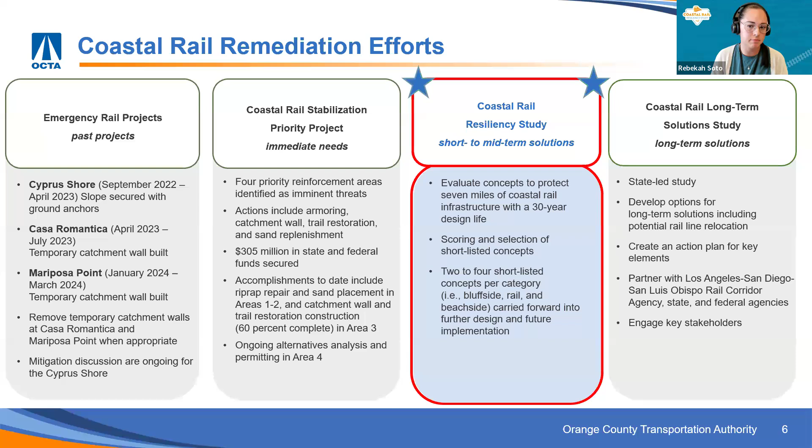Next slide, please. So through this study, we have produced the draft feasibility report, which is here. This is just a very high level overview of what is in that report. And the report is available as well for the public to take a look at. But essentially, it includes these key components.

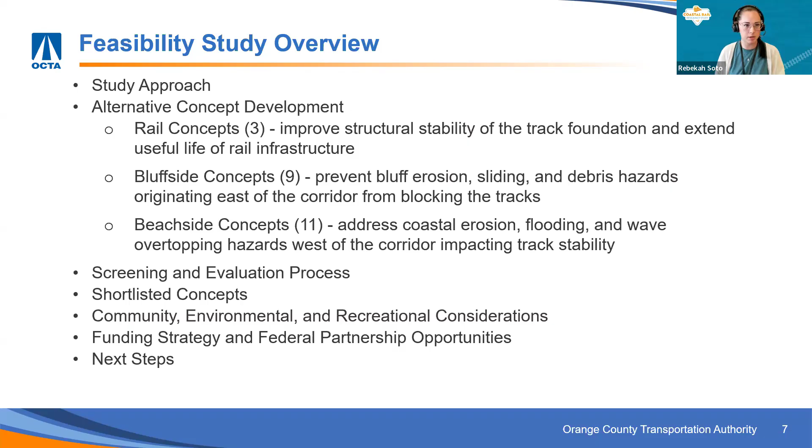We have the study approach, how we got here, what our goals are, our alternative concept development, how we started off with 3 rail concepts, 9 bluffside concepts, as well as 11 beachside concepts, and narrowed it down to that short list I mentioned. Our screening and evaluation process, those shortlisted concepts, as well as the community, environmental, and recreational considerations, as well as next steps, which involves funding strategies, federal partnership opportunities, as well as what the traditional pathway for project development is anticipated to look like. Next slide, please.

And so I want to just acknowledge that we have heard the strong support for sand nourishment and the desire for recurring placement to be integrated into sand retention strategies. We've also heard concerns that shoreline protection structures will permanently eliminate sandy beaches. And we've also heard the desire for more clarity on long-term planning and rail relocation.

In response to that feedback that we've received, we have added a one-time sand nourishment to all shoreline protection structure concepts. So if there's hard armoring involved, it will come with sand. As well as we've provided additional conceptual design to be included in the draft feasibility report, as well as providing more information on the next steps upon completion of this study.

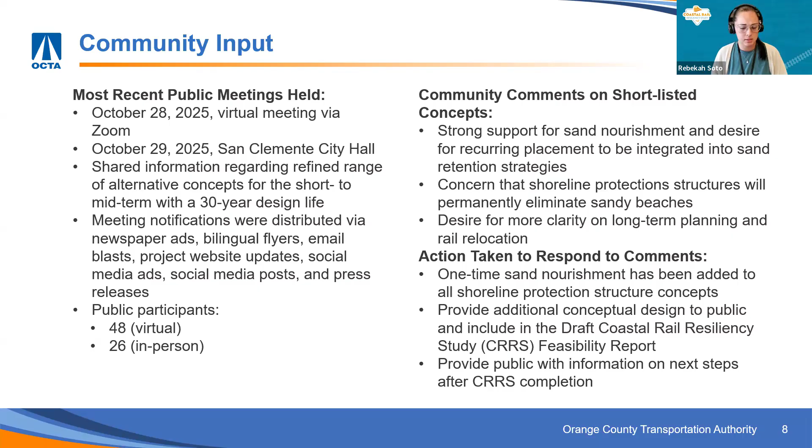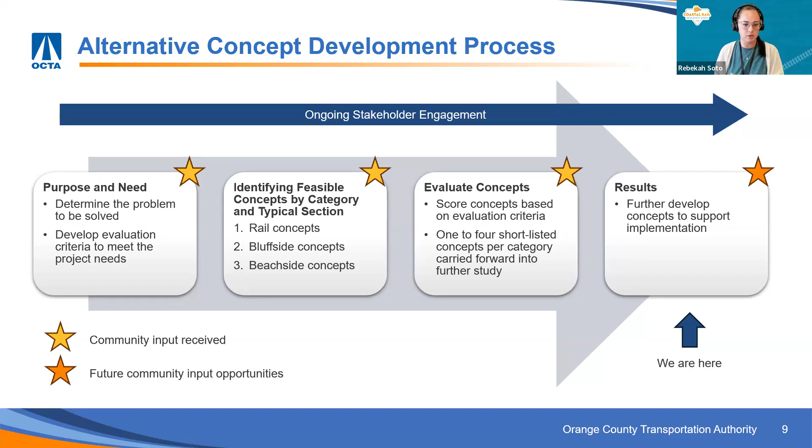Next slide, please. As a quick refresher, the 2 rail concepts that the study ultimately recommends to be carried forward are alternative materials for critical railroad infrastructure to reduce those life cycle costs, as well as ground improvement efforts. The 2 bluffside concepts to be carried forward involve catchment walls, as well as tiebacks / soil nail / pin pile walls. And then for the 4 beachside concepts to be carried forward, and again, these all include a one-time beach nourishment with each shoreline protection structure. So that would be riprap, engineered rock revetment, seawall, or a combination of any of the above.

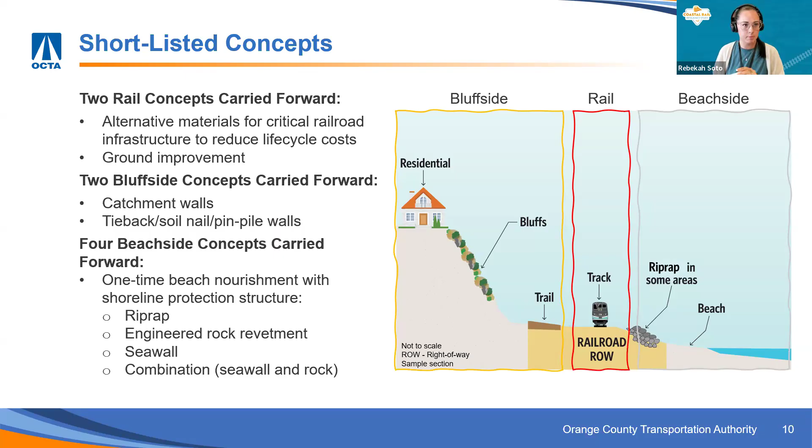With that being said, I'm going to hand it over to Avi Shah, who will go over these concepts in a little more detail. Yeah, thanks, Rebekah. So I just want to dive in a little bit deeper on some of these shortlisted concepts. So we have 3 categories that Rebekah described.

So first, for our rail concepts, the ground improvement helps stabilize the track bed in areas where we've seen severe drainage issues. And we can do that with the installation of soil columns that add competent soil and stabilize that track bed. So it really helps deal with ongoing maintenance issues, issues with our ballast and ties. So this competent soil will help solidify and help stabilize our track bed.

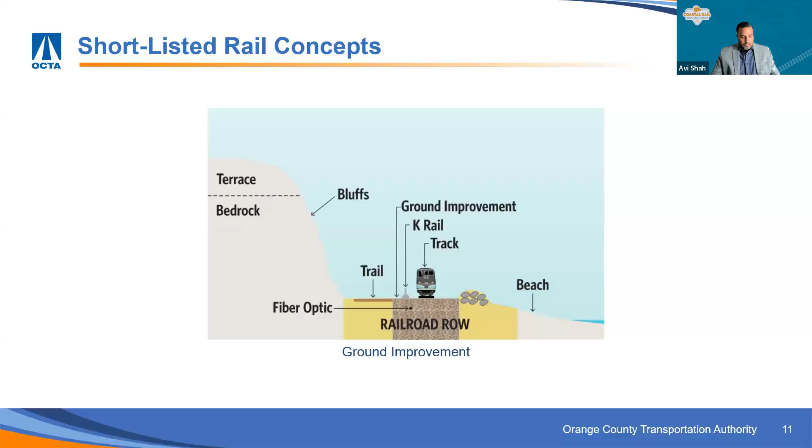Next, I'd like to discuss our bluffside concepts. The first one here is the catchment walls. The catchment walls are intended in areas that are experiencing surficial failures along the bluff. And the catchment wall is constructed at or near the railroad right-of-way, and its intent is to catch any sort of debris that may be falling onto our tracks and impacting our railroad operations. It just serves as a physical barrier from that debris entering the railroad right-of-way. Improves safety and provides ongoing operations for the railroad.

The next concept here are the tieback walls. So these are usually used for deeper seated landslides, and it utilizes a steel tieback anchor that's drilled into the soil or behind a wall, and it's intended to resist the earth pressures in order to basically pin that slope down into the competent earth. Again, this addresses issues where we see landslides happening from underneath the railroad and that are pushing the railroad in one direction, help stabilize that.

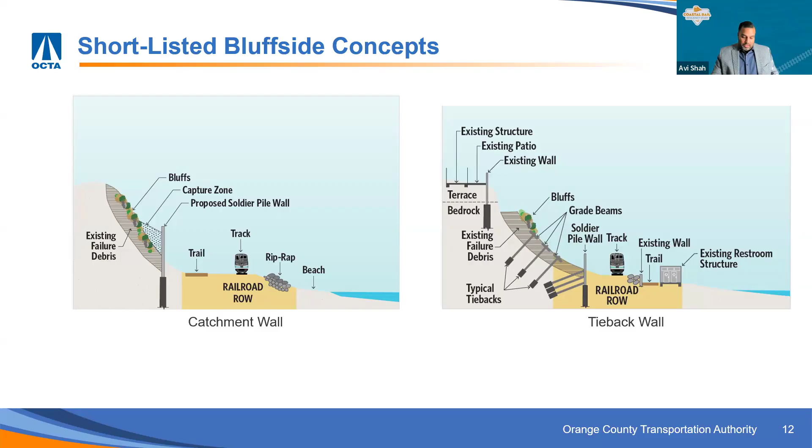Next, we have the soil nail pin pile walls. These are intended for slightly shallower landslide planes that we have seen in some of the bluffs near Dana Point and San Clemente. And this concept consists of either soil nails or pin piles that are driven into the ground, either at an angle or vertically, to resist lateral soil movement and provide slope stabilization. The pins or piles are drilled through that failure plane in order to meet into that competent earth.

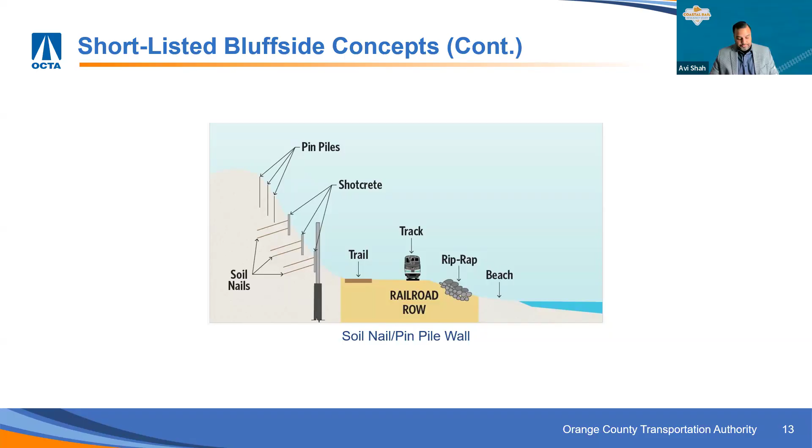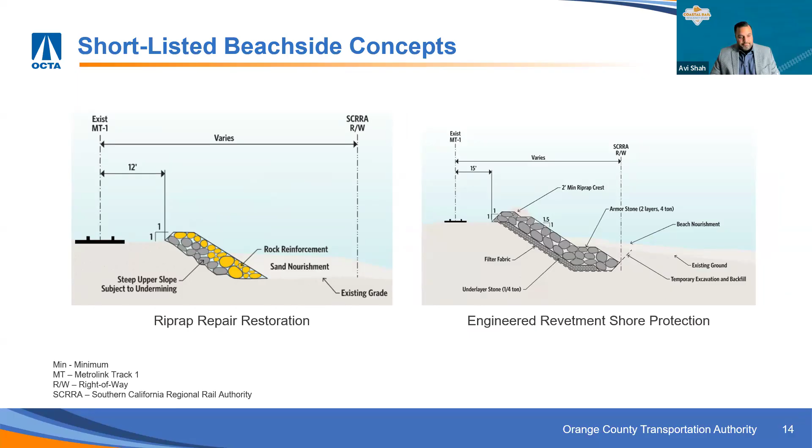Then next we have our seawall shore protection, and this is a vertical element or structure that's intended to protect the track embankment from scour, erosion, and wave overtopping. And it's intended to minimize the horizontal footprint placed within the rail right-of-way. The seawall with the revetment shore protection is similar. It's kind of a combination of the seawall and the engineered revetment where we're providing additional scour protection at the toe of the wall. So those, again, 4 concepts would be paired with that one-time sand nourishment.

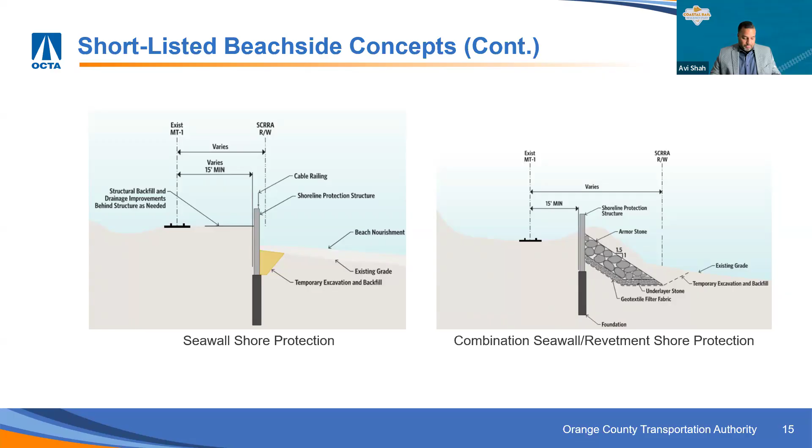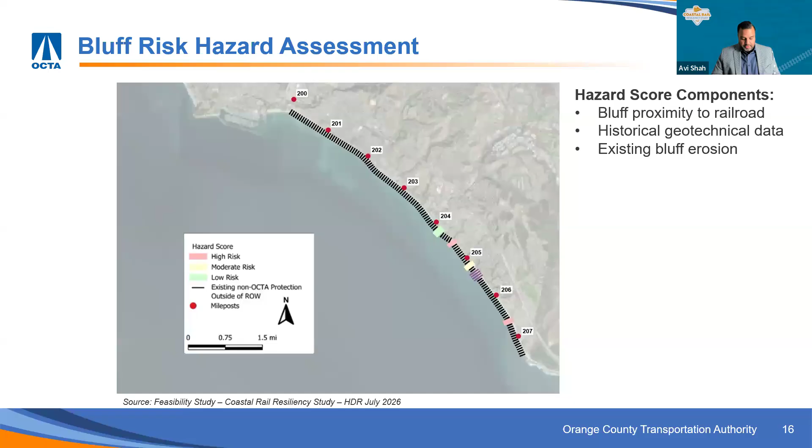And then next, I'll pass it to Russ here to provide an overview of the coastal rail risk assessment. Sure. So in addition to the bluff hazard assessment that Avi just described, the team also performed a high-level coastal hazards assessment for the rail corridor. And basically we took 3 pretty basic hazard score components. One is just how much sand at the time was present in front of the particular location of the rail corridor. The amount of sand represents kind of the natural shore protection that's there.

The next parameter is how is that changing? Is that an area where the shoreline is eroding or stable or maybe accreting? And then finally, the third component is what's the existing level of shore protection? For example, in 2025, there was riprap repair conducted between North Beach and Linda Lane. So that would have a certain reduced risk because it's recently repaired.

There are other areas which presently have little to no shore protection, so that would be more of a higher risk area. The results come together to form this ranking, and the high risk areas, shown in more of a reddish color, are where we would be looking at applying the shortlisted alternative concepts for the beachside alternatives.

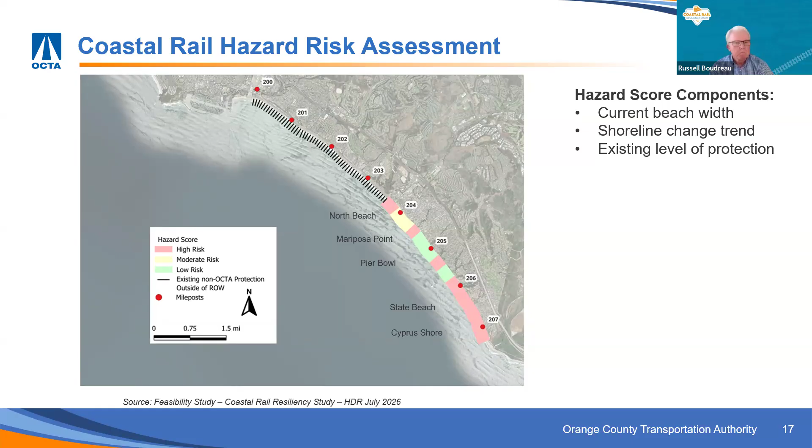During this month and over the next few weeks, we will continue to obtain feedback from public stakeholders as well as other interest groups through the rest of this summer, and then eventually work to finalize and publish the final version of that report, which we anticipate in late fall 2026. Next slide, please.

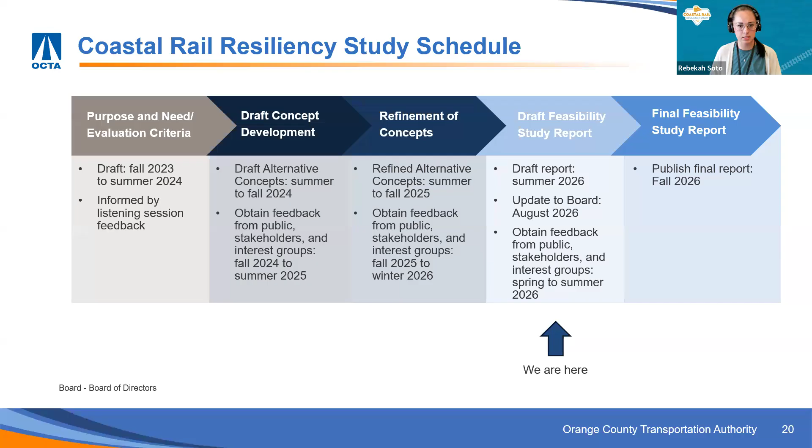What happens next essentially is that the recommendations that come out of the study, those shortlisted concepts we've overviewed, upon completion of the study, will be handed off to our capital group. And what they'll do is go through the process to identify the project-specific locations to implement the different shortlisted concepts, with some early design to determine the specs.

So while at this point we can't say where, when, how big, and how long a seawall would be exactly, it is during this phase that something like that would be determined. Same thing with the sand nourishment, which will ultimately be tied to the projects that come out of this study.

More than likely it's not just going to be one big project that comes out. This study will yield a few different projects, packaged together depending on area or priority or however our experts determine those projects need to be packaged. And then we can put together all of the specs I mentioned.

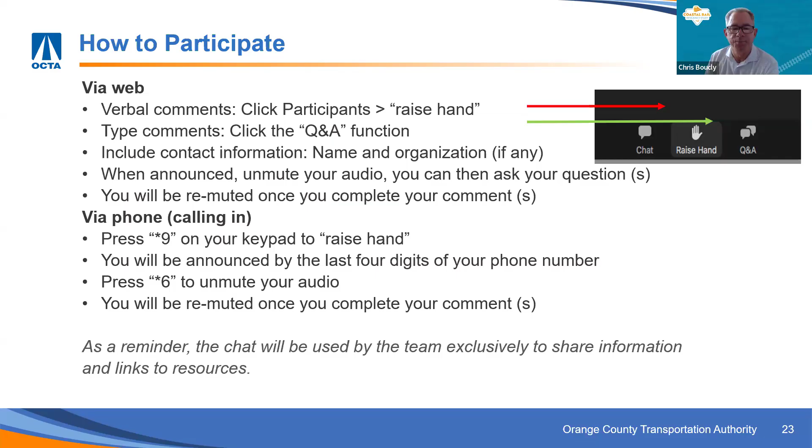The first one I'm going to read off comes from Dennis Bress. He's a resident of Newport Beach and wants to thank us for the hard work in keeping the rail line functioning, the LOSSAN rail line. He says he was on Amtrak 591 from San Diego Old Town to Irvine yesterday at 7 p.m., and the sunset was epic. I agree, I was out there watching the sunset myself. It was pretty amazing.

He continues: as you know, this rail link is vital to all communities up and down the coast, especially Orange County riders and commuters, to make it to South County cities, all the way down to San Diego. Knowing of the work being done interrupting Metrolink passage currently, we're grateful that Amtrak is still able to make the passage. Rail is vital, and we value your hard work. Thank you, Dennis, we really appreciate the comment.

The next comment is actually a question from Leslie Meyerhoff, who I believe is with the city of San Clemente. The question is, what level of design do the coastal rail resiliency study concepts reflect?